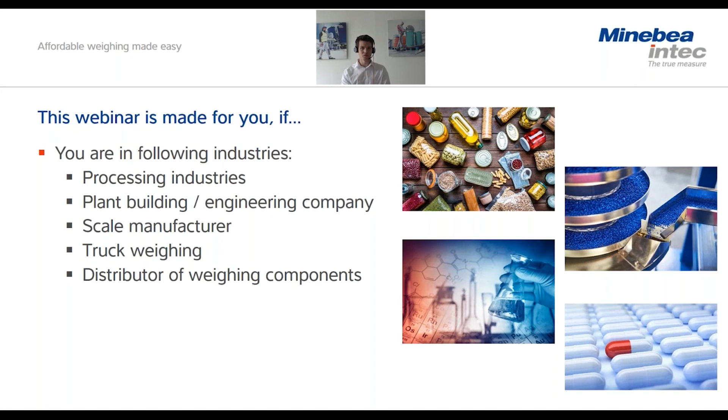And of course, last but not least, any kind of distributor of weighing components, like our partners - I know some of our partners are listening as well - will get some interesting information today. If you're not listed here, you're of course welcome to continue listening. I probably forgot you, but you shouldn't skip listening now.

Before I continue with the new products we launched or some new information, for those who are not deeply involved in weighing processes, let's get an introduction to where weighing processes in the production flow are required.

Let's start with the acceptance of loose material. In any production, you will get materials from your suppliers, and normally you will pay them by weight. This payment by weight has to be controlled, which is normally done by truck weigh bridges. As I mentioned, the components come from us, Minebea Intec - the load cells, weight indicators, and so on.

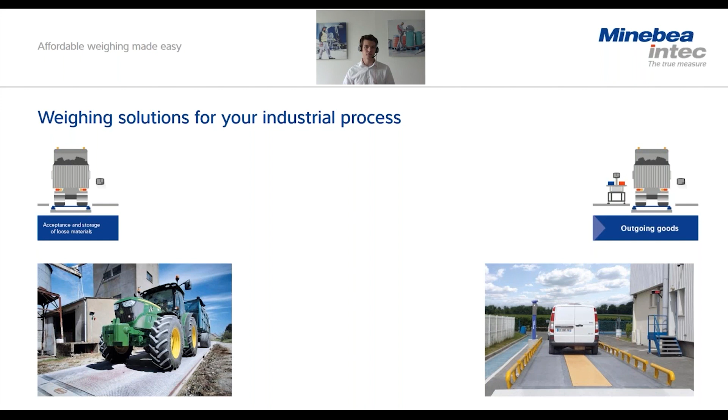The same is going on for outgoing goods. When you're shipping goods, you want to know how much you are shipping, and you want to receive the right amount of money.

Afterwards, you have to store the material. It can be outside the factory in silos or inside the factory in some kind of silos and vessels. You probably want to know how much material is at this moment in the vessel. This is easiest possible with load cells, as the load cell can be mounted on any kind of silo without doing something inside the silo or reconstructing it.

Depending on the requirements of the sensor, you can simply mount a load cell below the vessel foot and connect it to a weight indicator, which will then translate it to the language your production system is talking. Then you will always know if the silo is full, half empty, or completely empty. And if it is completely empty, you can automatically program it so that you will order the next batch of material from your supplier.

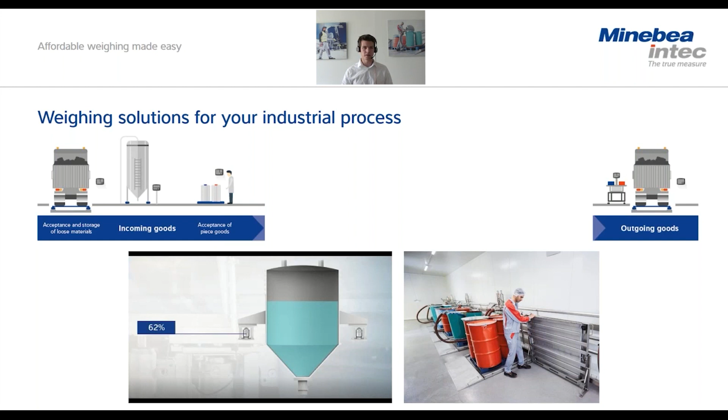Within a production system, you can have different kinds of production automation processes. You can have mixers, filling stations, depending on your product - in the food area, if it's flour, sugar, whatever, or if it's different kinds of paintings where you want to mix the right color. For all these production processes, precision is one of the most important requirements.

With our load cells, you can get precise, reliable weight values, which can be processed for the next steps. It can either be transmitted directly to your PLC, or we offer weight controllers, which can handle the complete production flow with the valves, pumps, and mixers. We can even program it for your weighing application, for example, with different recipes.

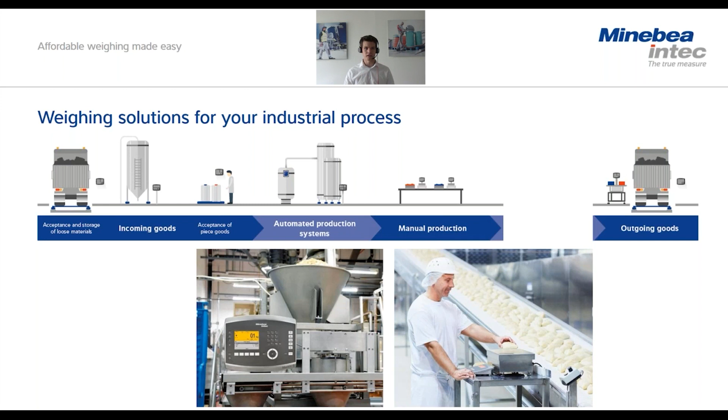In the end, you have a final product and you somehow want to pack it. Then we offer different products like check weighing systems where you can check the weight of the final product at high speed. We have different products depending on your requirements, high speed, lower speed, different capacity ranges, and so on. In addition, safety is probably one of the highest requirements in your production.

We offer metal detection to check if there's any piece of metal, or vision systems and X-ray systems for different kinds of foreign bodies. So in each step of the production flow, weighing solutions and inspection solutions are, as I said, useful or even necessary.

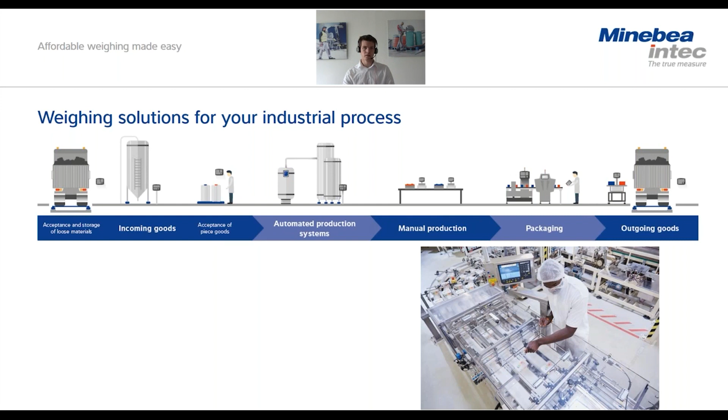As Minebea Intec, we can supply products to support you in all of these steps and deliver the right solutions. But let's continue now with silo weighing, as this is the main use case for the types of load cells we produce here in Hamburg, right next to me in our production.

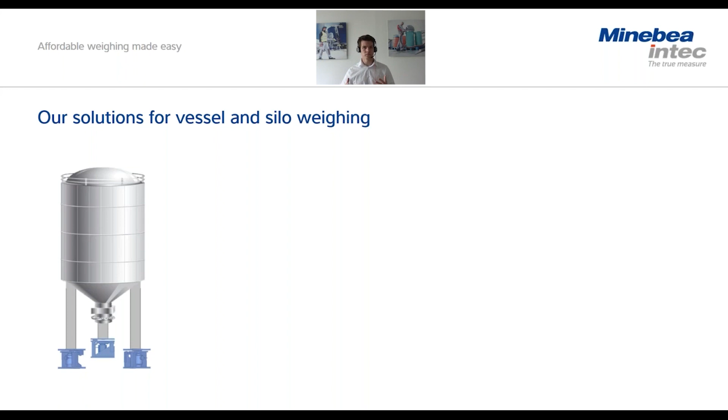On the left side, you see a typical silo. It is a silo with 3 legs, and below the silo feet we have mounted a load cell with mounting kits. The load cell can have different shapes. Some examples will be shown here. Depending on your requirements, you can choose different kinds of load cells. As today is about affordable weighing made easy, I will focus on explaining just 3 kinds of load cells as examples.

We have, for example, the pancake load cell. You can guess its name because it's flat as a pancake, and it's made for level control measuring. As I said, you want to know if the silo is half full, completely full, or empty. A pancake sensor is enough.

What is the benefit of using a pancake compared to other load cells? The pancake can be used for pivot weighing, which means you only need 1 pancake load cell. On the other feet, there are pivots at the same height. Then you directly connect the pancake to a weight electronics. This enables a really cheap solution for a whole weighing solution.

If you have higher requirements, you can go to a beam type load cell. The beam type load cell has capacities up to 5 tons per load cell. So for smaller vessels within a production hall, for example, this load cell might be good enough. It is a low-cost solution. It is not perfect for side forces, but for standard weighing applications, this load cell is most of the time sufficient.

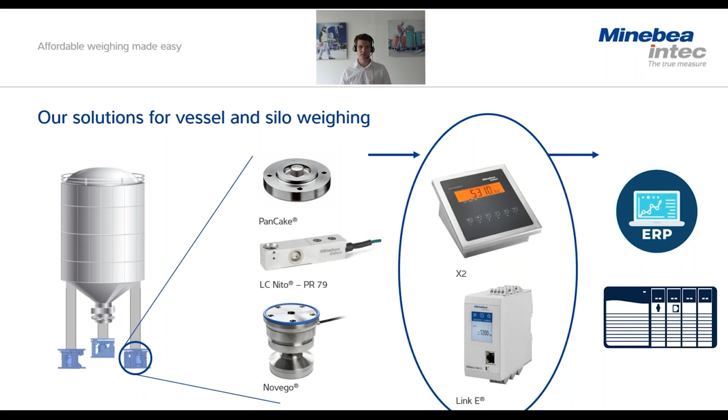The X2 indicator is a simple, reliable weight indicator. If you just want to have a storage silo and pass by to see it's 1.5 ton full, then this product is good enough. Same for simple process vessels where you don't have to connect different valves and mixing processes, or program a recipe. It's just about checking that the weight is correct right next to the silo, on a table, or at a cabinet next to it. Then the X2 is the right product for you.

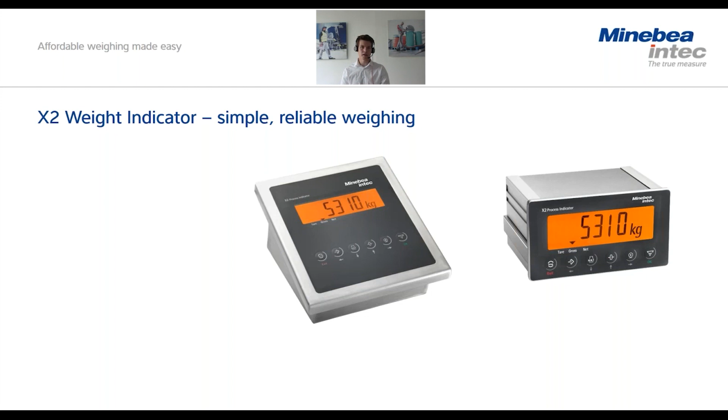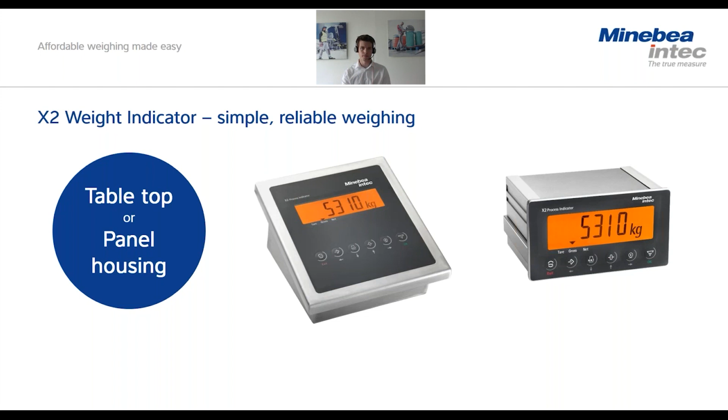You have 3 simple decisions to take. The first one is the housing. You have a tabletop housing, IP65 protection class made from stainless steel, or a panel housing for cabinet installation. We have a 230 volt version or 24 volt version, depending on your production. The 230 volt version is not yet launched, I will communicate the launch date soon. And you have to choose your interface.

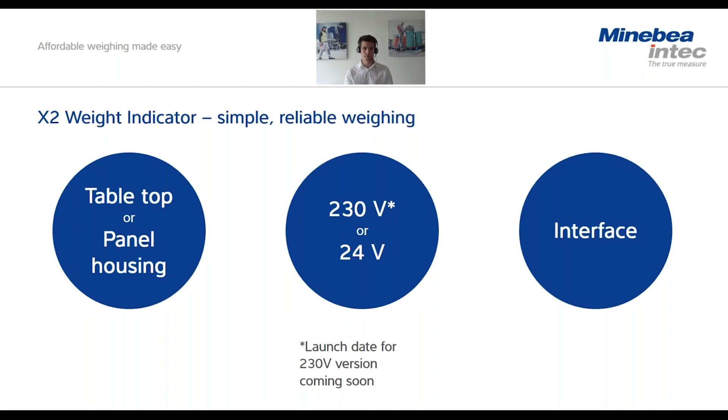For interfaces, we have some standard interfaces. Always included are 3 digital inputs, 3 digital outputs, and a serial communication interface, RS232 and RS485 with Modbus RTU, for connection of printers and to connect a remote display, for example our PR5110. Optional, you can choose one of those interfaces: an analog output, or a field bus like Profibus, or an industrial Ethernet field bus like Profinet or Ethernet IP. So normally everything you need is possible for your simple weighing application.

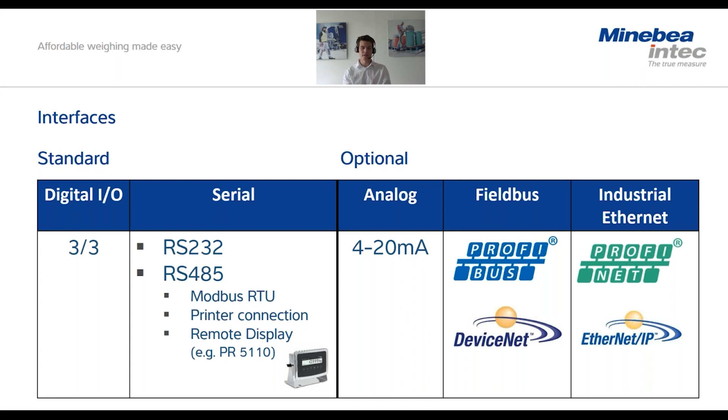In general, all the main field buses you need are available as well with the X2. The difference is that the X2 only has one fixed interface card. With the X3, you can choose between two slots, combining an analog output with a Profinet output, and exchange it in the field, which is not possible with the X2. Both have a 230 volt version and a 24 volt version, and both are available as panel housing for cabinet installation.

What I think is really new, and besides the pricing, the biggest benefit of the X2 indicator is that we have a tabletop housing. For this price segment, we didn't have any solution. The only tabletop housing we had in our portfolio was the Maxxis 5, which, to be honest, is over-engineered for simple weighing applications. It's made for complex applications, precise or special requirements with ATEX, different weighing points, and so on. With the X2 indicator, we now have a tabletop housing for a lower price, starting at €1,500 list price.

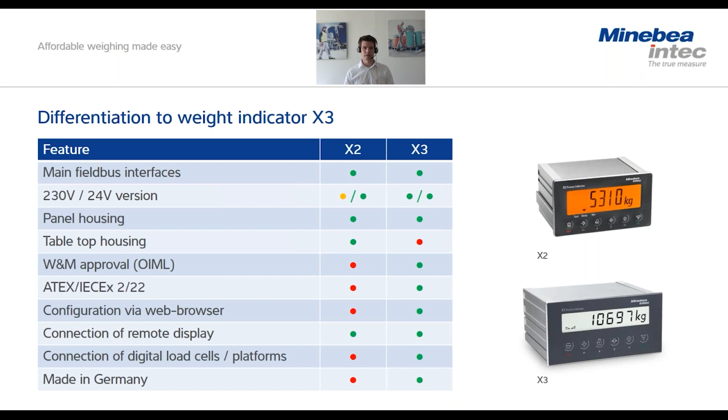Let's have a last slide about the X2. I won't bore you with all the numbers, it's mostly for your handout so you can see it. You may know our PR numbers if you're a partner: the X3 is the PR 5410, the X2 is the PR 5310, one number smaller. We have different types — panel housing, tabletop housing, different kinds of interfaces — each type has one number. It's not configurable, which means less options, but easier decisions to take.

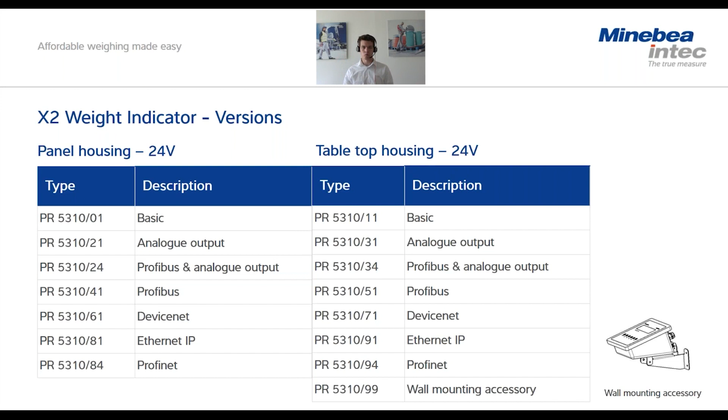For the tabletop housing, we also have a wall mounting accessory available. So if you don't have a table next to the silo and no cabinet either, you can mount it directly on the wall next to the silo. I will continue then with the Link E transmitter.

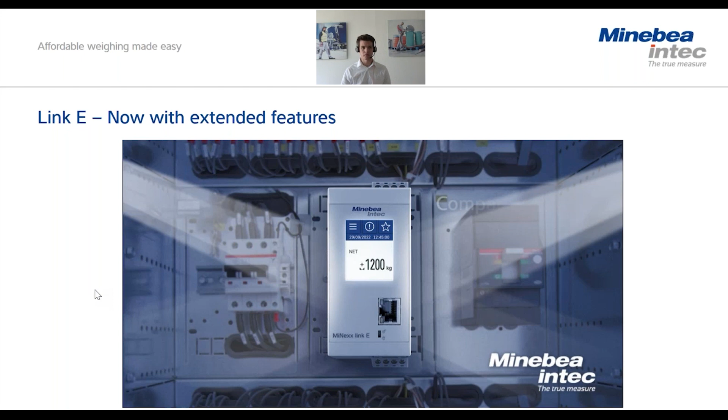Just to summarize, the Link E transmitter was launched last year in September 2022. In my opinion, it's a really great new product. It is one of the first transmitters, at least with such a big touch display.

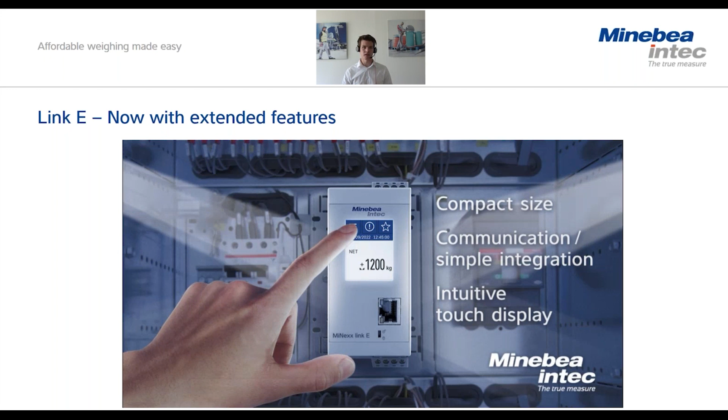You might ask, why is a touch display this size needed for a cabinet DIN rail transmitter? With this display, you have some real benefits in the field. I think it's always helpful if you open the cabinet and see the weight value of the silo and the load cells, and check if everything is fine.

You can open it and see the weight value, 1,200 kilogram, and it's okay. If it's not okay, you will see it as well, with error functions and so on.

In addition, it will improve the work and installation time. If there's a fail or you want to contact your service colleague, you can directly press some buttons there, go to a service contact, have a QR code, scan it with your phone and directly call the service contact, which is saved in the device. You don't have to check in the database and probably first check where to check at all.

In addition, you don't need to connect it to any kind of browsing system to check the IP address. You can directly check it on the device, go through the settings, see the network address, and directly connect it to your network, to your web browser. All of the interfaces are available for an affordable pricing, and the Profinet or Ethernet IP transmitter is available for less than 1,200 euro list price.

What is now new with the new firmware we will launch next week? The firmware 3.0 will enable new functions. We made it possible to have the set zero and tare function.

If you know the device, you know that you have password protection in the web browser, so you cannot change any settings without a login. This is a security issue, since you don't want anyone in your production to calibrate the silo itself without knowing what he's doing.

So after the password protection, you can now enable the set zero and tare function. You can either enable it only in the web browser, where you log in and on the calibration page do a set zero or tare of the silo. In addition, you can enable it for the touch display on the device, so you just press two buttons and do the set zero.

Of course, this might be a security issue, as someone passing by in production could press this button and all the material would be gone from the silo. But for the set zero, you can do a normal limitation so that set zero is only possible between 0% and 1% of the net load or something like this. If it's higher than that, nothing will happen, so you ensure that not all of the material will be deleted.

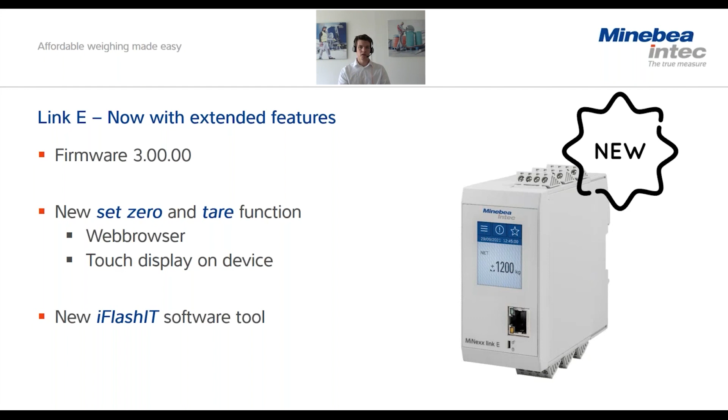I think I will directly continue with the next chapter now, and in the end have a question and answer session. I will now focus on some further new products.

This leads to the fact that single point load cells are one of the most sold load cell types in the world.

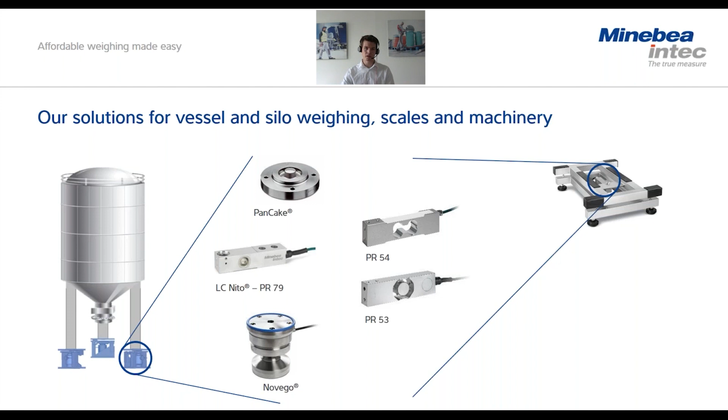But platform scales is not the only application for single point load cells. We have machinery like checkweighers, as we produce as well, or any kind of other machinery where a weighing process happens. For example, any kind of belt weigher or even multi-head weigher have single point load cells integrated. So you see there are many different applications in the machinery OEM business to sell or use single point load cells.

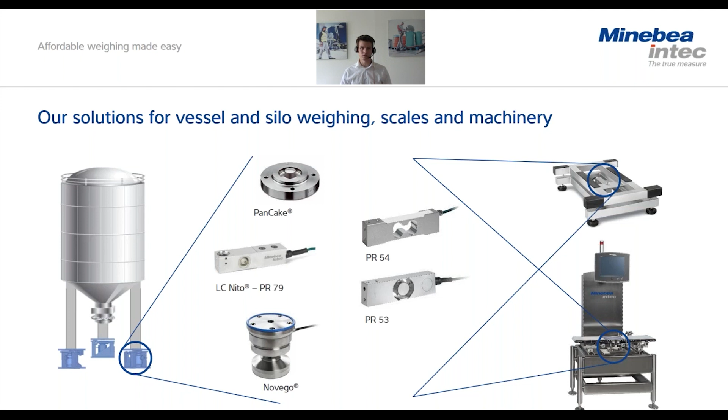As machinery is always important, the components need to fit inside the machine, so there are many different types of load cells. What is new now at Minebea Intec?

As you might know, since 7 years we are part of the MinebeaMitsumi Group. MinebeaMitsumi is one of the biggest Japanese machine building companies, for example, for miniature bearings. Miniature bearings of MinebeaMitsumi are in all of your electronic devices like laptops, smartphones, and so on. They have parts in every kind of car, your Mercedes, Tesla, and so on. And yeah, it's a huge company.

We are one part of it, and we use the synergies of this company and our company to develop these new products, the single point load cells and beam type load cells, and produce them in the factories of MinebeaMitsumi. So we ensured the engineering quality and the testing quality, in general the high quality of the load cells of Minebea Intec, together with the production capabilities of MinebeaMitsumi.

That's why we now have a whole series of new load cells, the LC series.

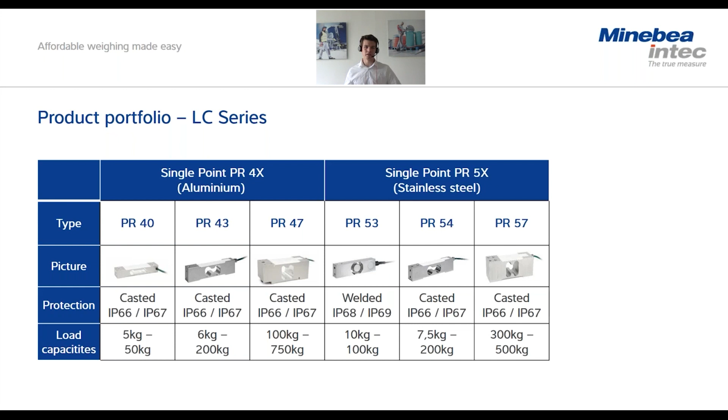But the PR53 is a hermetically sealed load cell. It is welded, so the strain gauges are better protected than at a PR54, where, as you see on the top, there's a white silicon layer, with the strain gauges below. You can, for example, see it at the protection class: 53 is IP68, IP69, versus 54 which is 66 and 67. But you will, in the end, also see in the pricing that the 54 is way cheaper than the 53.

In addition, we have the beam type load cells, LC Nito. We now have the PR77 load cell launched. The PR79 will follow around October this year.

The PR77, you might know this design, it is exactly the same design as the competition, which I will not mention by name here. But you can be sure that it is a one-by-one replacement. The whole pattern is the same and you can directly exchange it. It might be that you're looking for a second source, or maybe you just want to see our price range. Just ask for a quote and our possibilities. You cannot lose anything by just asking.

The PR77 is, as usual for this kind of load cell, available from 10 kg to 500 kg. It is standard already Zone 2, 22, same as our stainless steel single point load cells, so no worries about hazardous areas.

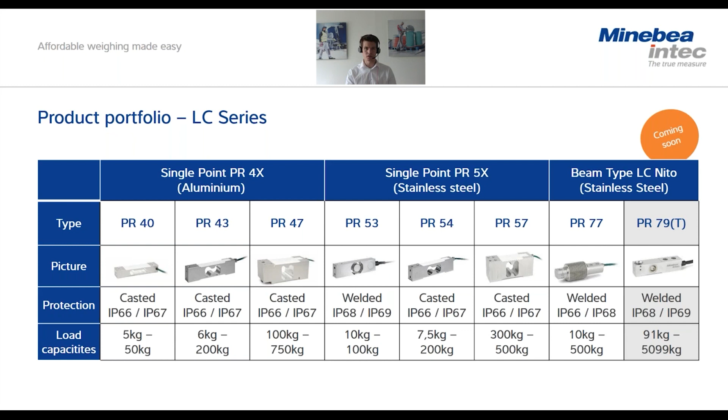Let's sum up what we have learned today. In general, I think I could show that for many of your production processes, weighing is the best choice. It is the most reliable method for level control and filling and dosing processes.

You can easily connect it to a higher level process. You just have the load cell connected to our weight electronics - that's a measurement system, a whole measuring chain you get from us. And then you get the language you need, like Ethernet IP, which can be connected to your PLC.

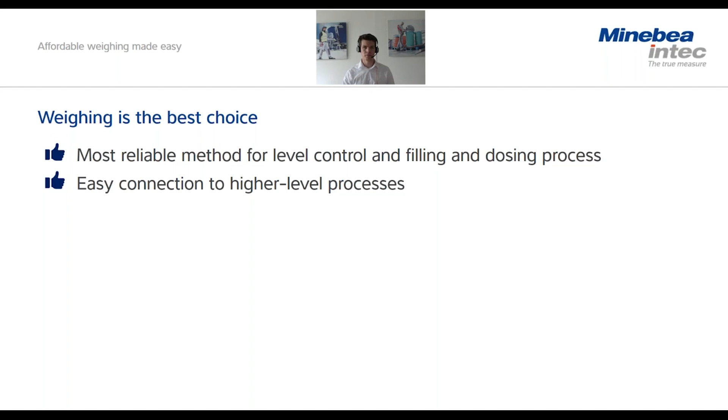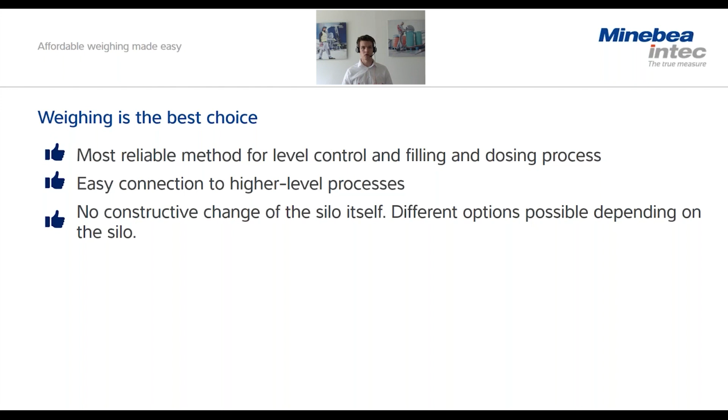You do not have to change or plan the design of your silo depending on this sensor. Of course, the silo will be a bit higher, maybe the weighing foot or vessel foot has to be designed, but the silo itself can be focused on the material you have in storage or want to work with in the dosing process, as the load cell is mounted outside of the vessel compared, for example, to some radar system for level monitoring inside the vessel.

Because it is outside of the vessel, we have no contact to the materials inside, which is more hygienic and more safe. In addition, we have solutions in stainless steel, either the Novego load cell, where everything is hygienic, or for our standard load cells we have stainless steel mounting kits to be on the safe side. Load cells are in addition robust and long-lasting products.

Normally the load cell will not be defect if you install it right. It can hold, we know it's holding, 20, 30 years. There are plenty of running installations for 20 years and longer. So normally if something is wrong, it's not the load cell itself - something happened, or it is the electronics behind it.

Which will lead in the end to low service expenses, as you installed it once, and especially if you don't have legal for trade applications, it will run forever. That will lead in total to the cheapest and most reliable way for level monitoring and filling processes. Even though the installation costs may be higher than with other sensors, on the longer term you will see the benefits. And it is nice to know you don't have to worry about these types of sensors, which should just work in your production.

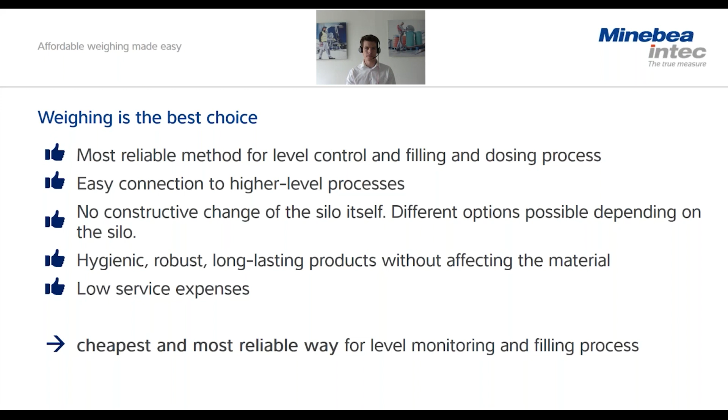If you're interested in more material, especially our partners can always address us for product presentations. Data sheets are available on our homepage, and 3D drawings for the load cells will be available there too - if it's not online right now, you can get it from us anyhow. You will find many interesting how-to guides, for example related to this webinar, a single point load cell guide where you see the differences between aluminum and stainless steel load cells and different kinds of applications. And you will find plenty of webinars you can download and listen to - just check it out on our webpage.